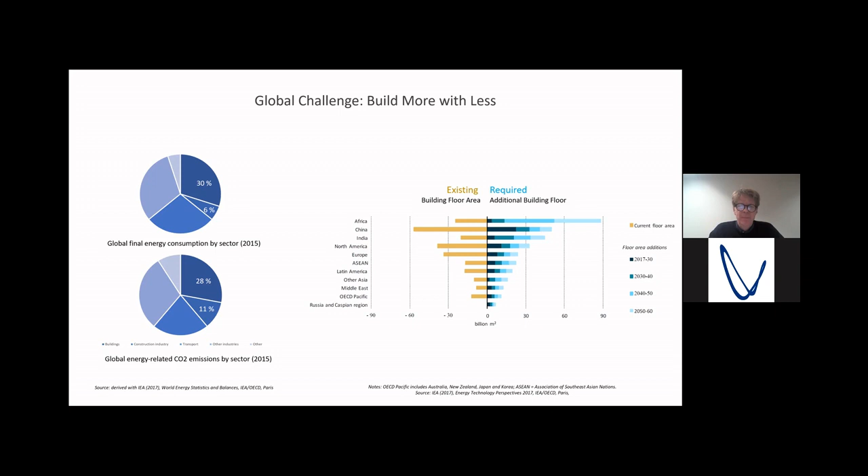But as you all know, there's another slide that many of you know: the productivity in the construction sector is stagnating or even decreasing, in contrast to all other fields of technology where we have watched an increase in productivity during the last decades.

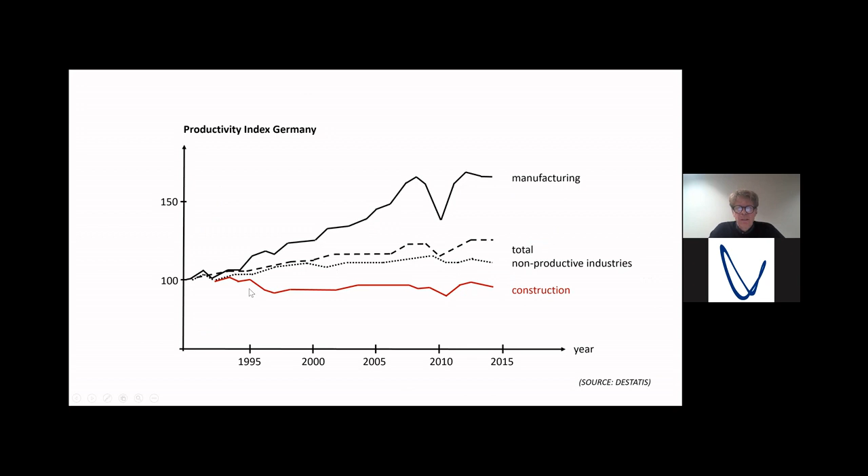And this low innovation, this low productivity growth, is directly linked to the fact that the construction sector has the lowest digitization index. So we constantly talk about computational methods in design, but this is only about design, not about what's happening on site, on the construction site. These processes are still manual, as they have been 10, 20, 30 years ago.

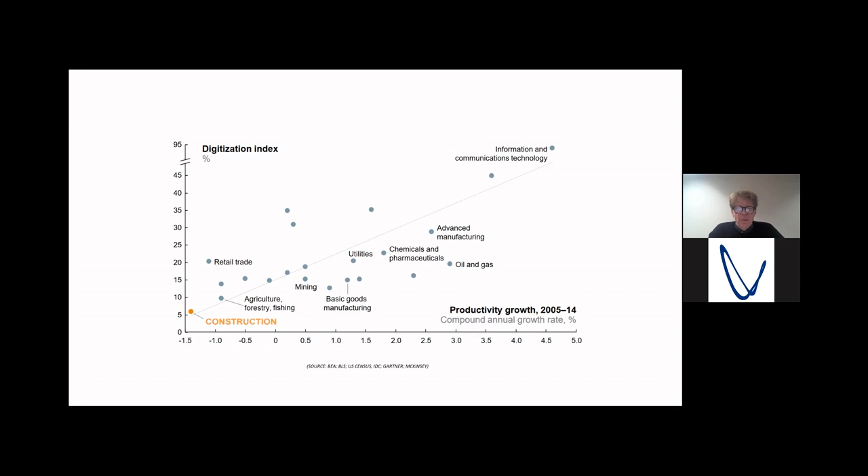So the discussion about digital methods in the building sector is currently very much shaped around the notion of building information modeling, but building information modeling does not question the linear process as it is. It just tries to automate it and make the design process more efficient, more reliable, and faster. And building information modeling also doesn't question the quality of the building itself that comes out of this process.

And we think our key argument is that we have to break up this notion of a linear and hierarchical organized building process that begins with the design, then comes the engineering, and finally construction on site.

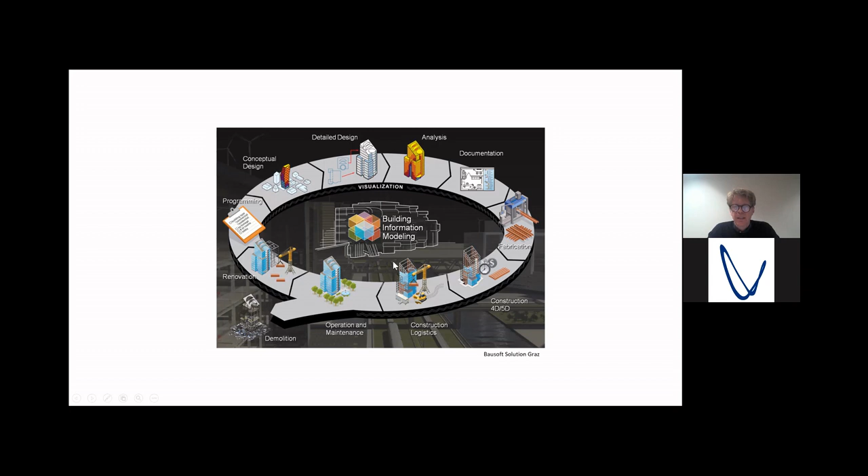And our key graph is what you can see here. We think that in a parallel, feedback-oriented, and open-ended process, we have to work simultaneously on design methods as well as on building processes. Only in this way can we create really new building systems that meet these global challenges that I was mentioning at the beginning.

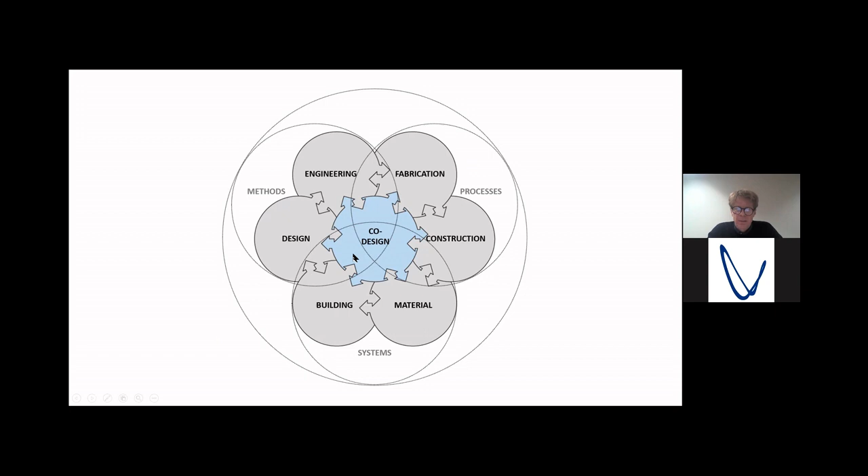So we did this here in Stuttgart together with the group of Achim Menges and my group, as a kind of collaborative endeavor. We did these kinds of experimental buildings over the last decades. The goal of these buildings is to show how this mutual development of computational design processes as well as robotic fabrication processes can lead to really new structural systems beyond the existing typologies that we have.

And the aim of this first project, the carbon fiber dome, was to show how this investigation of robotic fabrication processes can lead to truly new, innovative building systems.

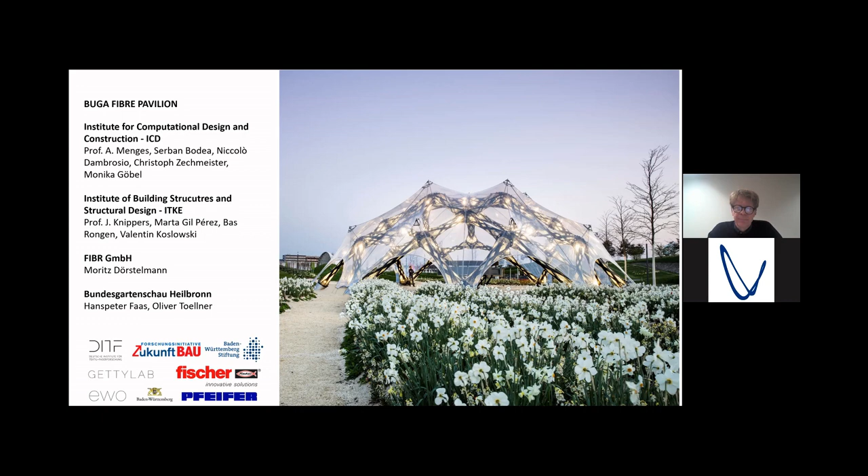And these kinds of fabrication processes, as you can see here, are only suitable for larger series. And I think that's the reason why fiber composites play only a niche role in the building sector.

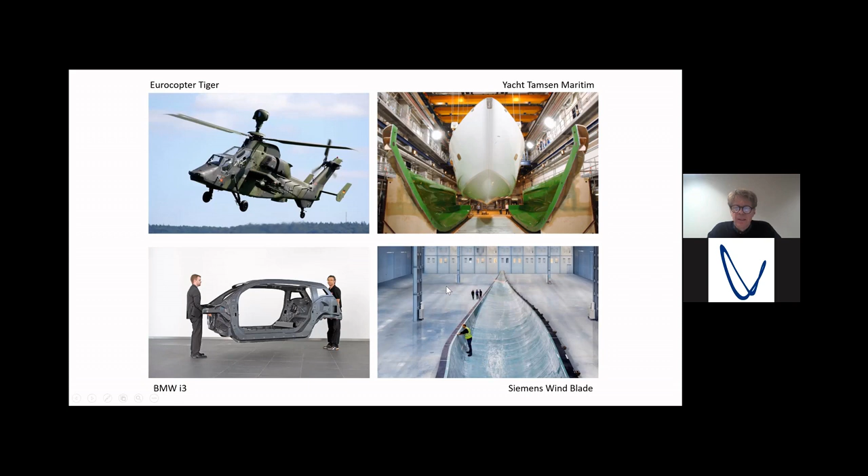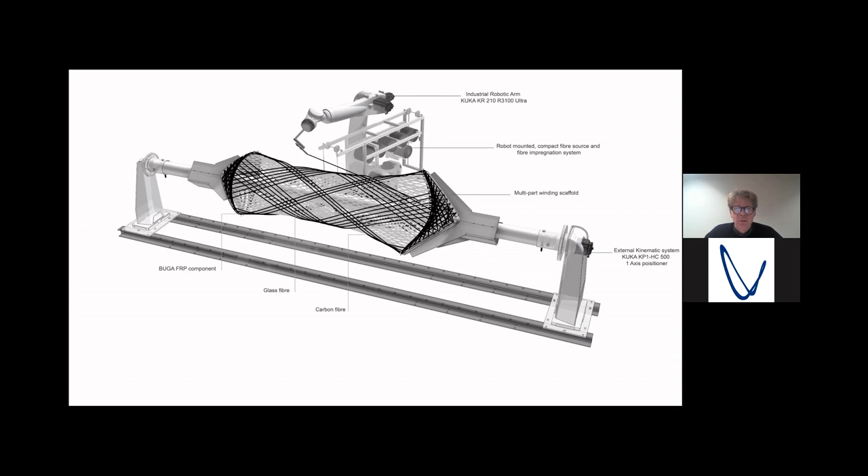So we thought that we, as architects and engineers, have to develop our own fabrication processes adapted to the specific needs, to the specific requirements of the building sector. We don't have this maximum performance criteria as in the aerospace industry. We need simple, robust, reliable processes that allow for large-scale components that can be easily adapted to different geometries.

And what we did here is we developed this process with a rotating axis and a frame, and the robot places the fibers on this rotating frame without any molds and also without any cutoffs. So only as many fibers are placed, ideally, as you need to carry the loads.

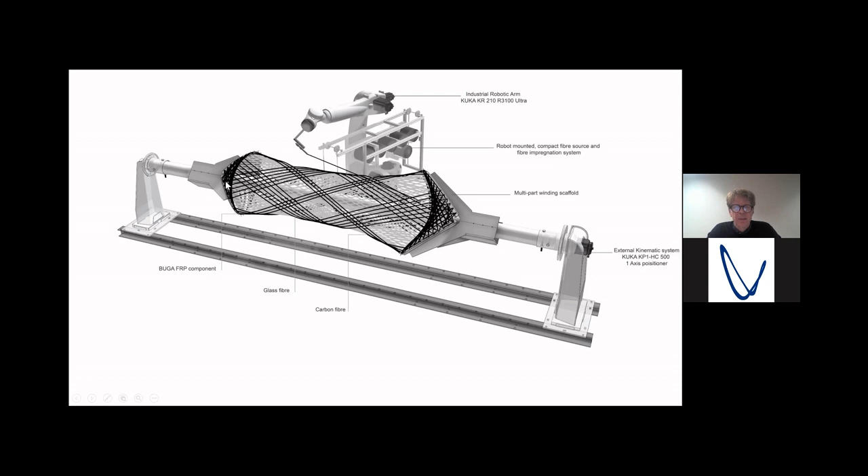Here you can see it. We have here on top these two frames that can easily be adapted to different geometric configurations. Then we place here the glass fiber body, the hyperbolic glass fiber body. Glass fibers are cheap but weak.

And then in the next subsequent step, we place black carbon fibers adapted to the loading of the components. These fibers are resin-soaked, and then we put the entire package in an oven and cure it for several hours.

What you get here is a composite structure that is able to carry high forces without a mold, without cut-off of fiber mats, only as many fibers placed as you need to carry the loads.

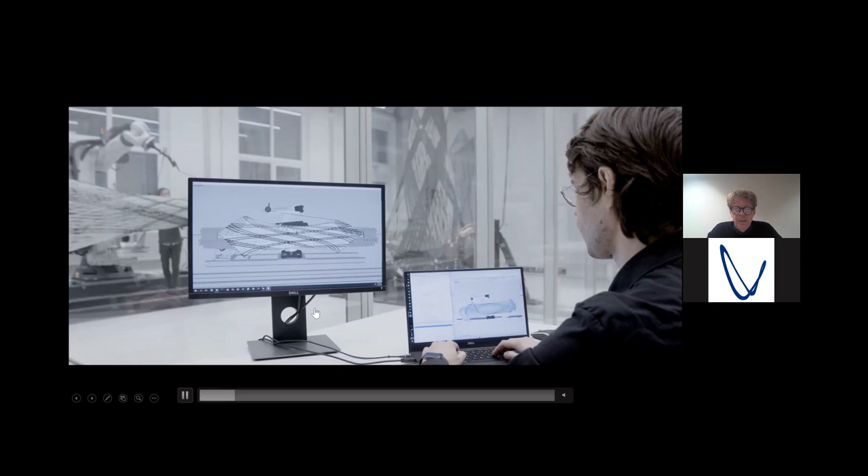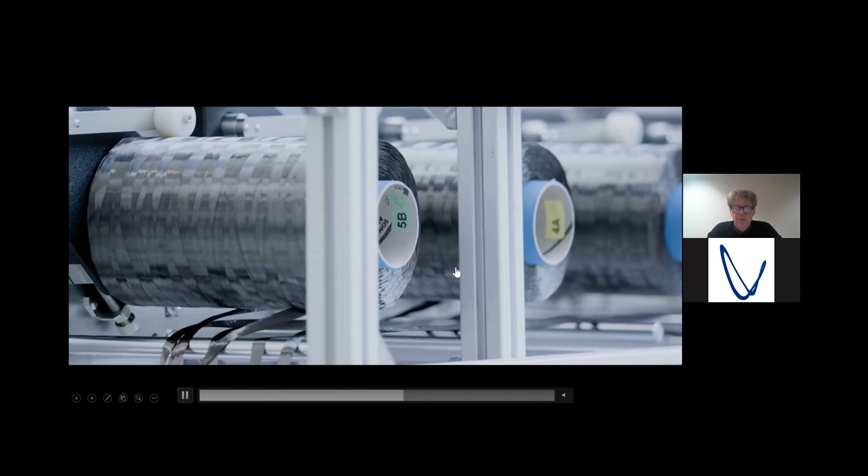Here's a video of the process. You can see the rotating frame, the resin-soaked wet fibers are placed here. It's real time. Here you can see the fiber spools pulled through resin baths and the rotating axis of the robot.

Here again, the dry carbon fiber spools pulled through a resin bath. Here, a device to control the tension, spring, and then the fibers are placed on this rotating scaffolding. So what I want to say is that we as architects and engineers have to develop our own fabrication processes adapted to the needs of architecture and building construction.

The structural design process happened in several layers. First, we optimized the overall shape of the dome by a simple grid model. We presented this at IASS 2019 in Barcelona. So the initial geometry was this sphere shell here, and it was then slightly distorted to reduce the bending moments in the components.

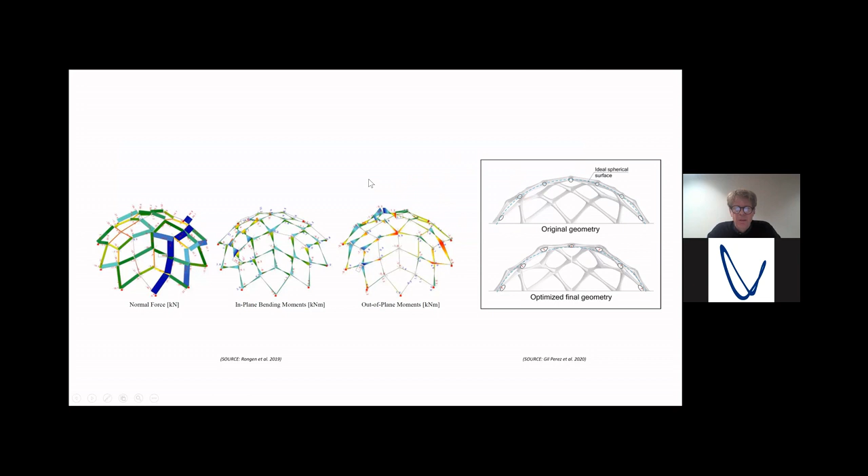Then we have a shell model to guide the fiber syntax, to guide the placement of the fibers and also the density of the fibers according to the stress lines. We also have models to calculate and analyze the loading in the respective fiber bundles.

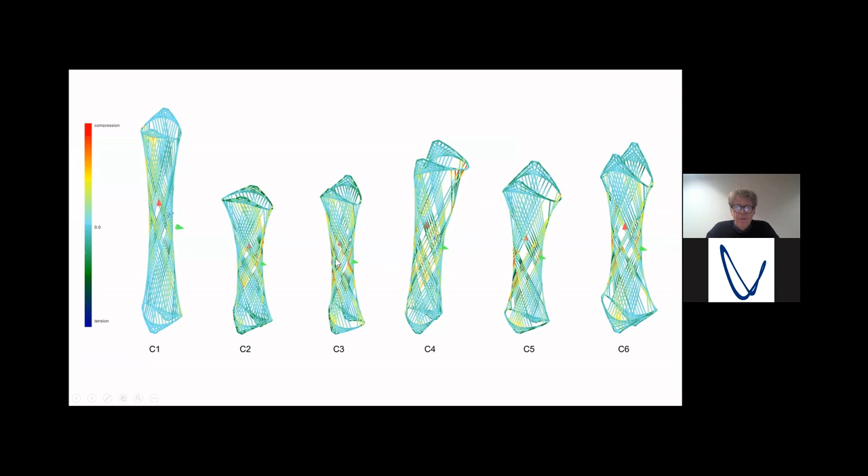But what we cannot do, we cannot reliably predict the failure load of the components. So we are still relying on a larger series of large-scale testing. I find this pretty interesting because this large-scale additive manufacturing process allows for a very differentiated, load-adapted fiber layout.

But at the same time you are thrown back to kind of pre-industrial engineering by trial and error, because these components are defined by so many parameters that cannot be reliably simulated.

And what we did here is this large-scale compression test, and it revealed that these components, which weigh 70 to 80 kg, can carry around 250 kilonewton compression force.

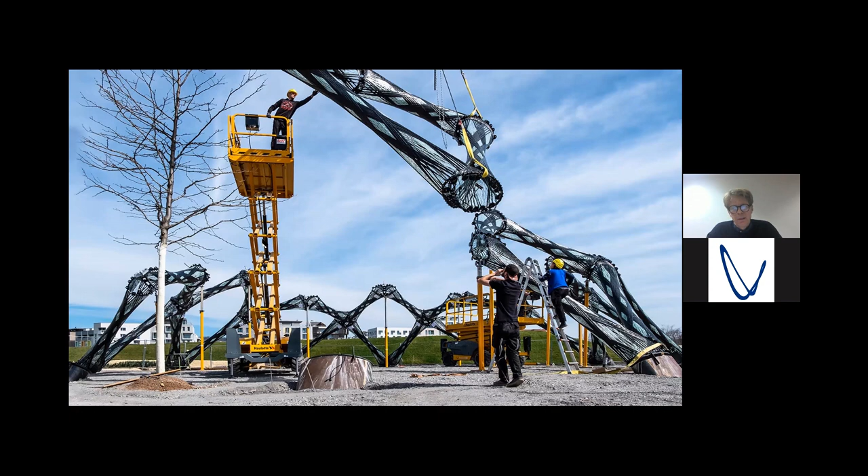And here you can see that these kind of fiber composite elements also provide a very different aesthetic, visual, haptic experience. The translucent glass fibers allow to guide light, to transmit light, to reflect light, also offering very different architectural opportunities.

And we are now at the threshold of transferring these technologies, these developments, to practice. We're working on several projects that display the potential of these materials.

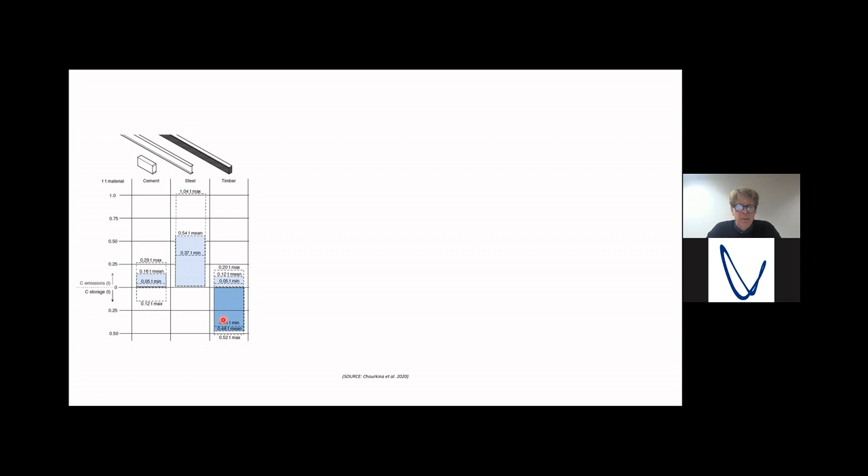And we can only turn this around by using this dark blue here, which is the carbon dioxide storage potential of timber structures. Here's this very nice graph from a scientific publication that was published last year.

And this is linked to carbon dioxide emissions. So the concentration of carbon dioxide in the atmosphere increased.

And if we want to reduce it, one of the few means that we have right now, in 2021, is to see our buildings as storage of carbon dioxide by using as much timber as possible. So replacing concrete and steel structures with timber structures is a very important means to fight climate change.

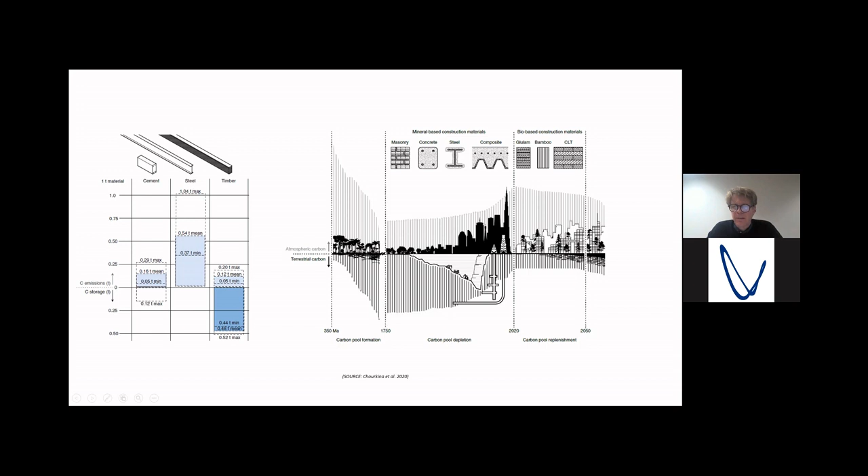If you look at current timber structures, you can see here one out of many examples, it's possible today to build very high and performative structures, but the architectural range is still very limited. You can see small and regular spans, a lot of steel inserts for the joints, and we still need concrete cores and concrete slabs for fire prevention.

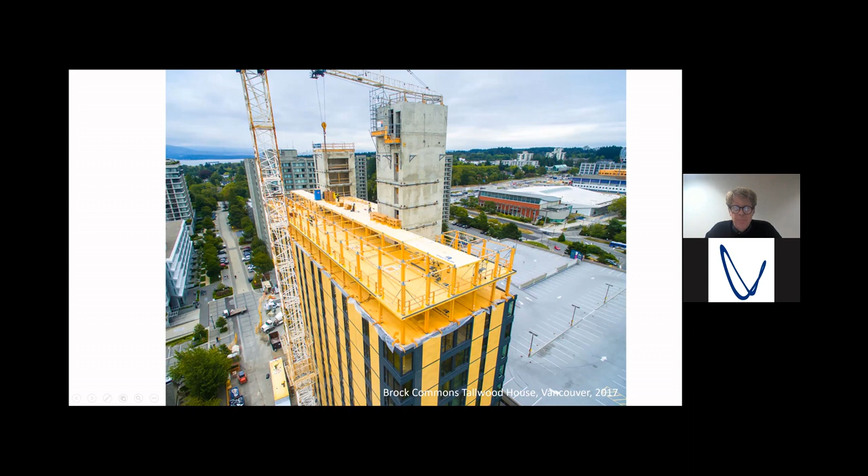The aim of the second pavilion, the timber pavilion that we did in Heilbronn, was to explore how we can widen the range of potential applications for timber structures.

We know, in particular here in this IASS community, that these concrete shells built in the mid 20th century are one of the highlights of spatial and lightweight engineering, but you don't find them today because the effort and costs for their erection and scaffolding are so high that no one is willing to pay for it.

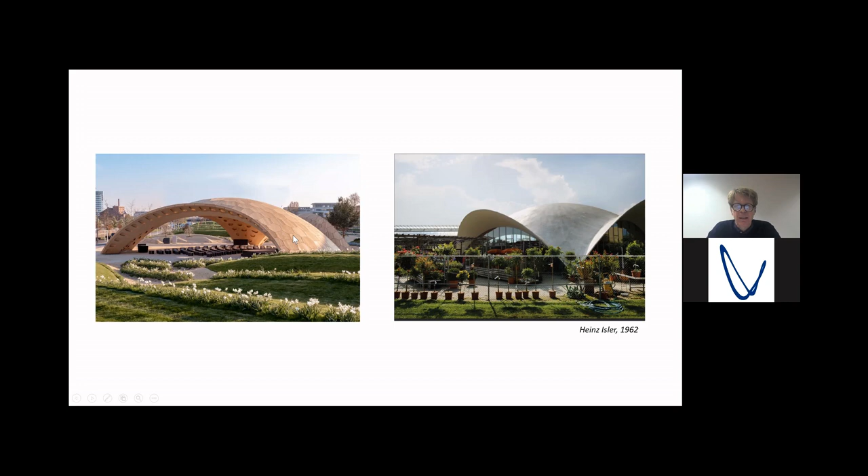We also differ from these 20th century shells in that we did not look for the perfect shape. We investigated which deviations from the perfect shape are possible and allowable to give more architectural design freedom. You can imagine that these S-formed edges are, from a structural point, not perfect, but they add a lot of architectural quality and artistic expression to the shell.

We investigated which deviations from the perfect form are possible.

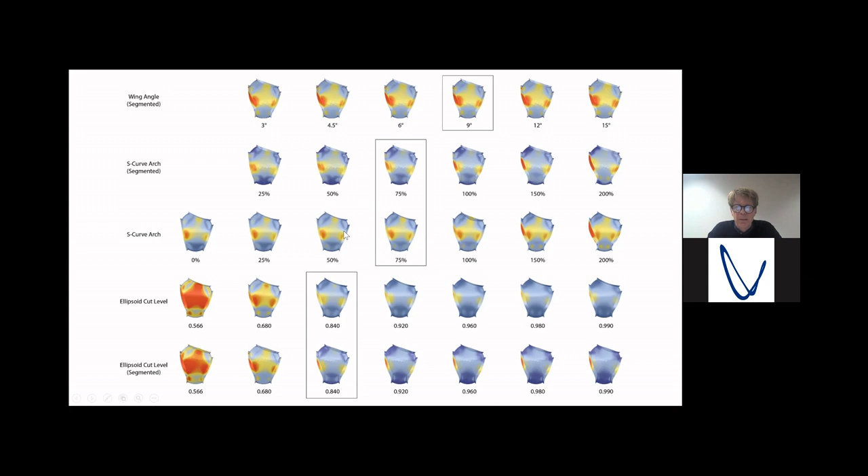Here the shell has a span of 30 meters with this freeform shape, mapped by these planar hexagonal components that you can see here. They all differ in shape and size, and this is only possible with a robotic fabrication, computational fabrication process.

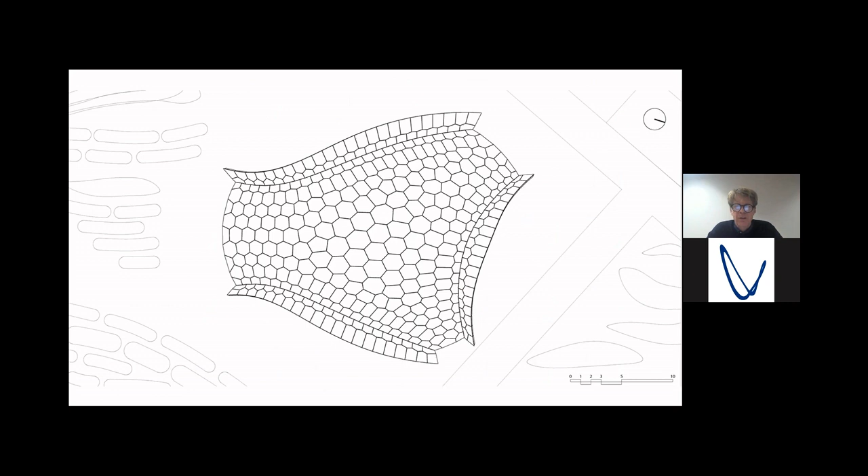Here you can see the structural setup. These three layers are the load-bearing structure: a top plate that carries all the membrane forces, edge beams to transfer the forces from one segment to the next, and a lower plate to stiffen and strengthen this cassette.

And on top we had this drainage and the outer cladding.

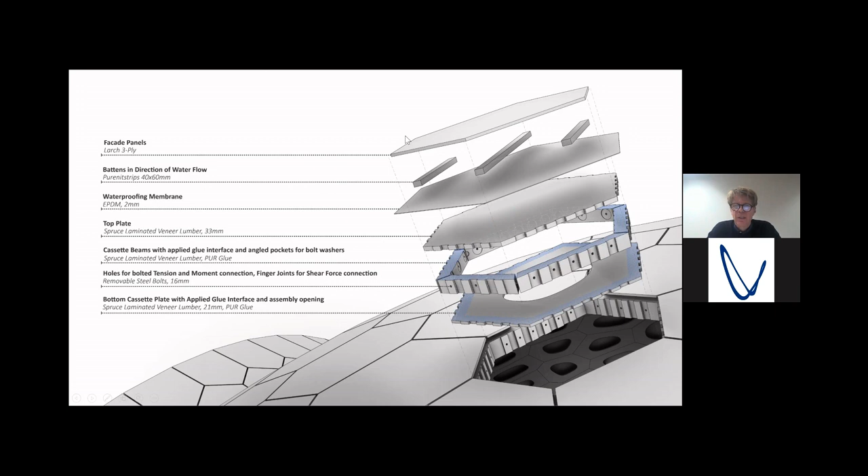Of course, there was a digital model that contained all the information needed for fabrication.

We had a mobile robotic fabrication platform installed in the shop of a small-scale timber manufacturer close to Stuttgart. You can see here these two cooperating robots: the one on the left is picking and placing the parts, and the right one is processing them.

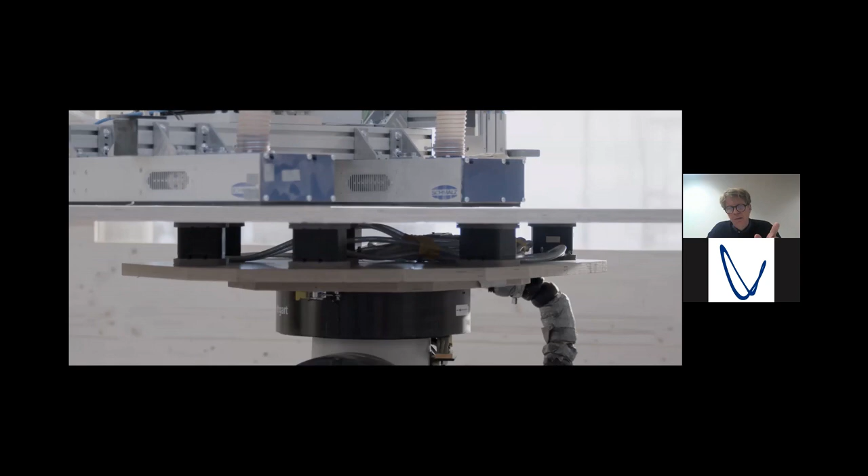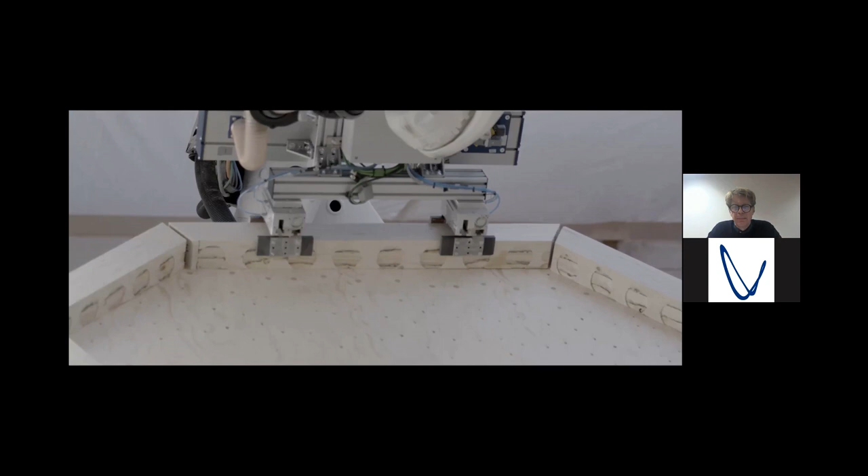The right robot drills the holes, applies the glue, and places temporary hardwood nails to fix the components. Then, in the final stage, after curing of the resin, you can see the placement of the glue again, the positioning of these edge beams, and these temporary nails for fixing.

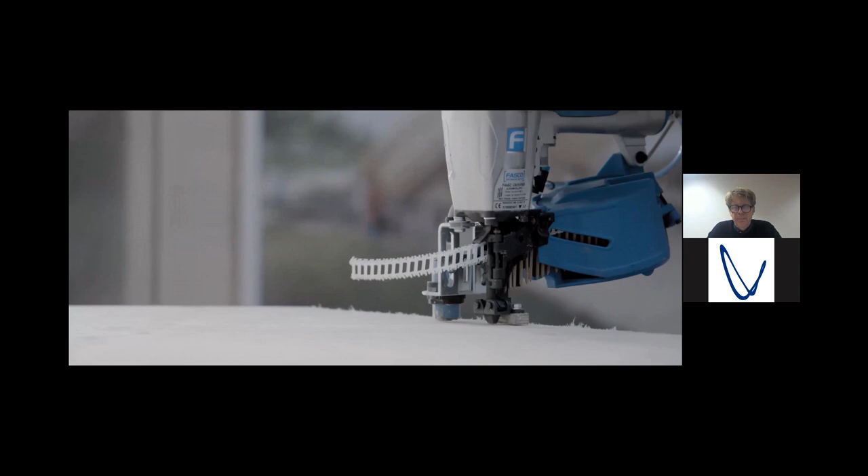What was very important here, also kind of surprising, is that we know from concrete shells that scaffolding is one of the main issues related to a lot of cost. What we did here is install this shell structure without any scaffolding, except for three supports we used to hold the edge beams.

This is only possible because these components are very light but stiff, which allows for installation without scaffolding, making this whole building system very competitive in terms of costs as well.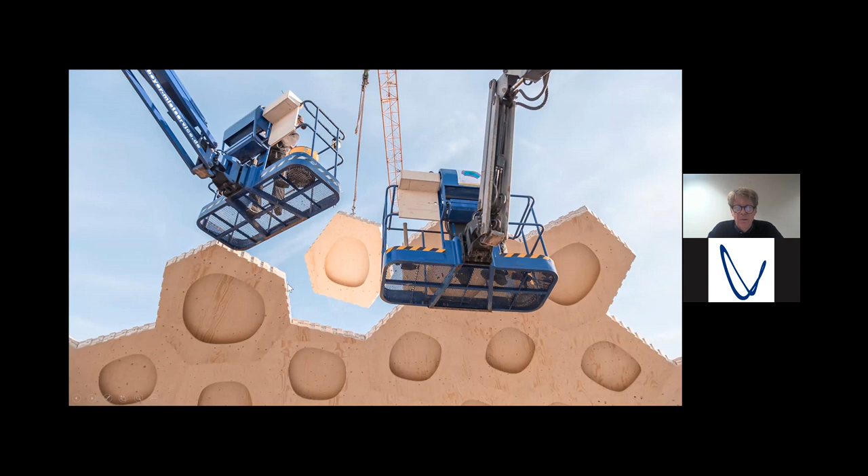You can see that all the forces are transferred by contact through these zigzag surfaces here. Only to carry the out-of-plane shear did we have to place some bolts.

Here you can see that this was the last component after installing 30 meters of span, and it fit without any problems. This was only possible because of the high accuracy of the fabrication process.

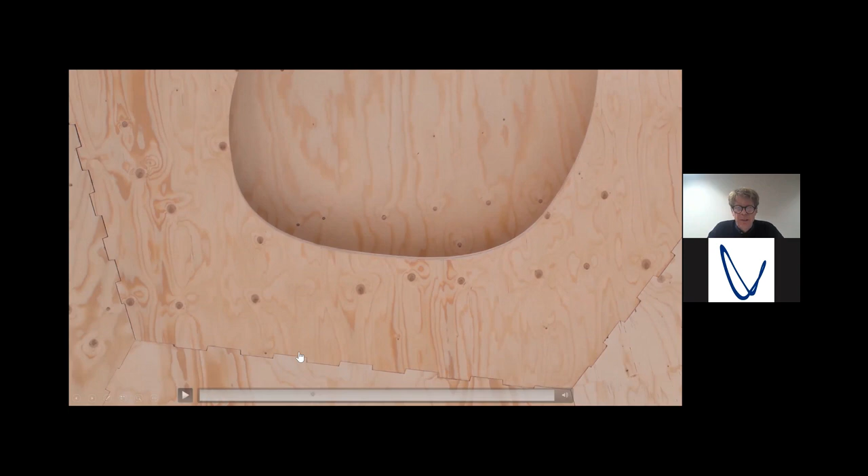As I said earlier, the placement of the bolts was necessary to carry the out-of-plane shear forces, and you can see here that this was pretty painful work.

The next step is to bring these augmented fabrication processes, these computational assembly processes, on site, not only in the shop but also on site.

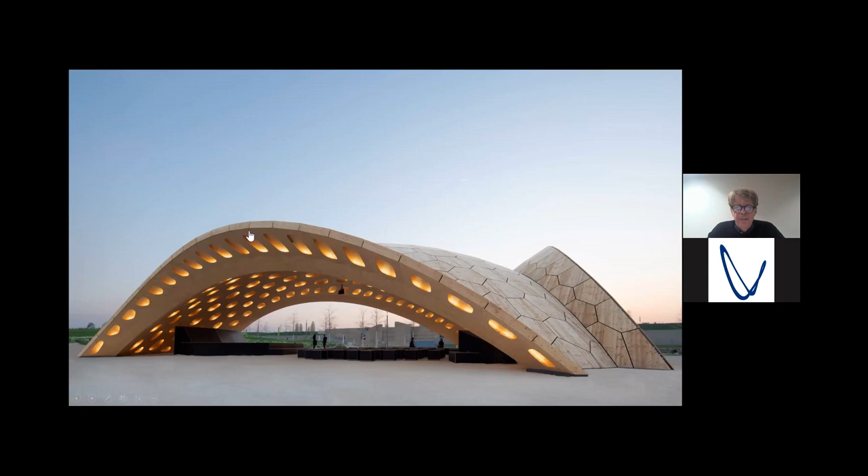This was the final structure as installed in Heilbronn, and it will be re-erected for the next gardening show in 2023 in Mannheim as a permanent building.

You can see from the inside the new architectural possibilities, pretty successful also because of its good acoustic performance, related to these hollow segments that you can see here.

I think this was already the last slide. Again, we have to think as engineers and architects not only of the design of the final structure, but also of the entire process, how to fabricate and install it. I think that's the main message: computational methods offer a lot of opportunities to create really new structures. That is what we are looking for here in Stuttgart.

Also here we try to transfer this to practice, and we see the potential, for example, in extension of the existing building stock, because the structures are light and the geometry can be adapted to the existing structure. We see potential in wide spanning structures made out of timber, and also in temporary buildings, because these structures can be installed and deinstalled without affecting the performance of the components.

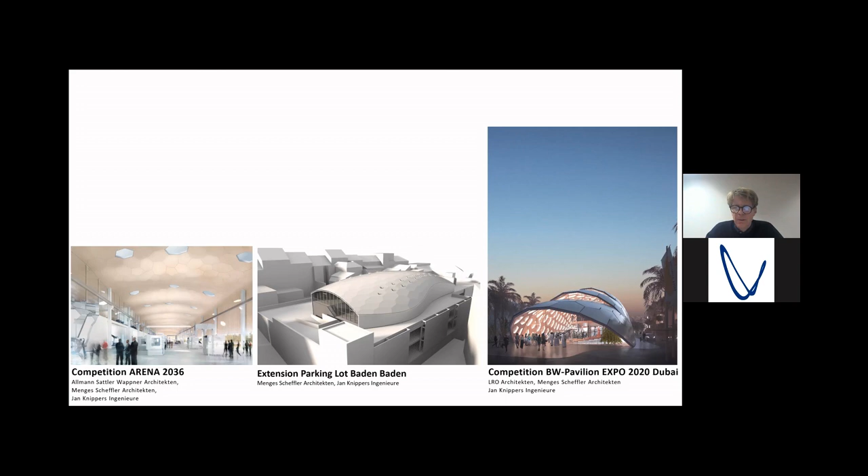Many people ask us, these are interesting shell structures, but what we really need are new systems for multi-story buildings. Our answer is always that we see these pavilions as a kind of demonstrator to fully explore the geometric, architectural and structural potential of the systems, but that in a subsequent step we transfer these ideas to more regular building systems.

So what we are working on now is multi-story timber buildings using the same fabrication unit. You can see the same idea of these hollow boxes with load-adapted webs, and we're trying to transfer the concepts we explored for the shell structure to more regular multi-story building systems. The same happens also for the fiber composite systems that I showed earlier.

Okay, I think this was my last slide.

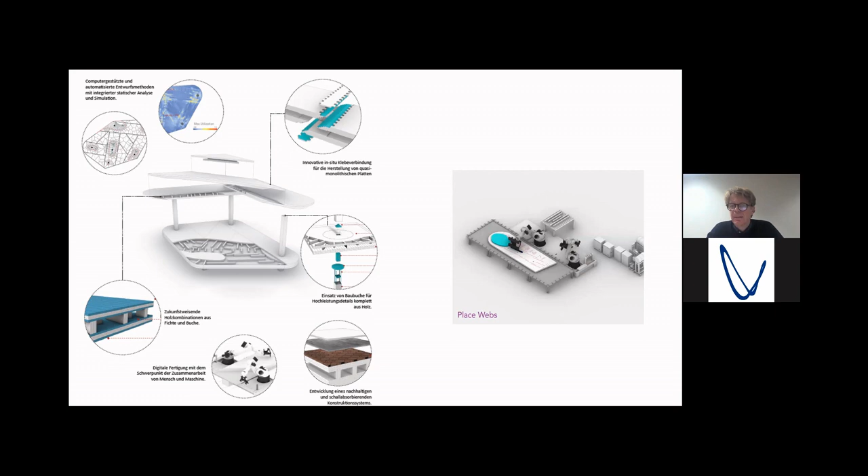We're now moving to the final section of the interview, which looks at the future of spatial structures. Now, a key theme of the 2021 conference is inspiring the next generation. What advice would you offer to aspiring engineers and architects looking to enter the field of spatial structures?

I have to say from my personal experience that I was not always a very happy student, to be honest, of structural engineering, because I was missing, as I said in my intro, this link to architecture, to culture, to society. For me it was very important that I started my career in an environment that offered these things I was missing. I think the most important thing, if you start your career, is that you look for people, for offices, for an environment that inspires and motivates you. That is particularly important in the very early phase of your career, because that's where you define the trajectory of your career.

I want to say that I think these IASS conferences are particularly good, perfect opportunities, in particular for young engineers to meet the whole field: old professors, young PhD students, from theory, academics, as well as from practice. I always found the IASS conferences very inspiring, because you had this whole range of people working on creative new structures.